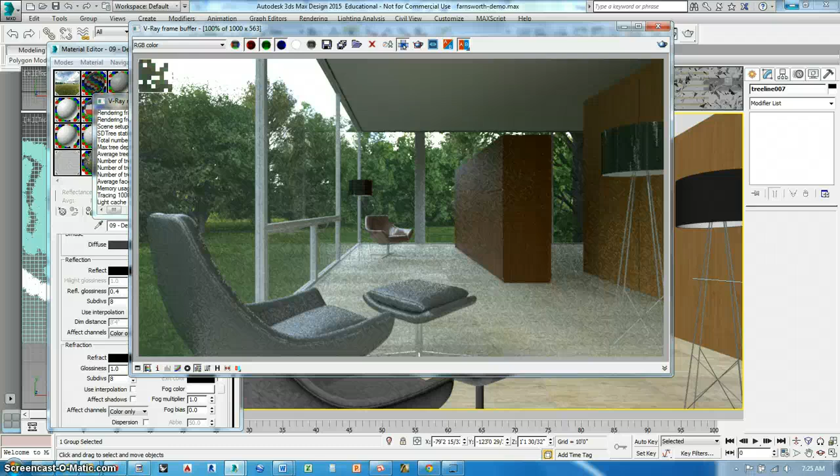Okay, so here's my final test render. This actually went pretty quickly for me, it took only about 7.5 minutes. It's just about done with this last little square. We still had the noise set relatively high, actually very high, and some of the other settings were set low.

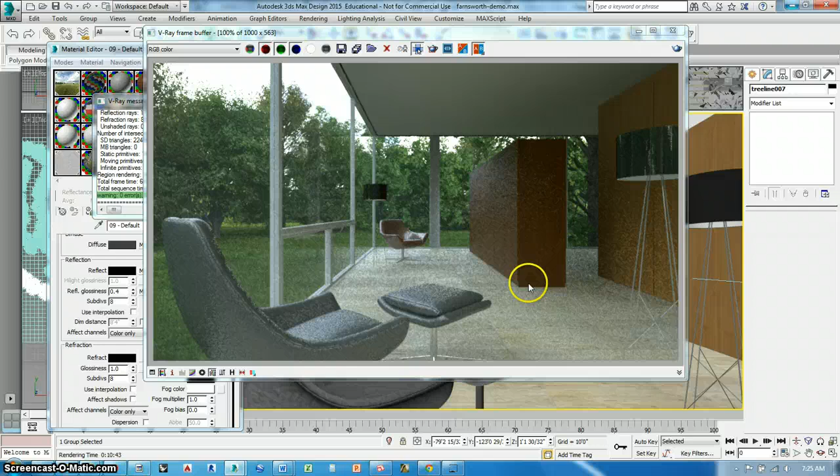This furniture layout's really bothering me, so I'm gonna change it now. I'm gonna try to set up my final render.

If you ever close out and you want to get that back, just go render setup, Vray, show last VFB, Vray frame buffer, and that'll bring it back.

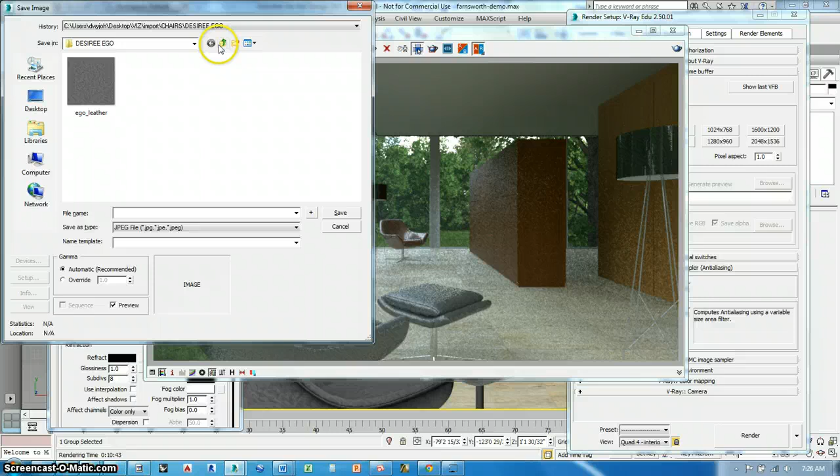To save the images, you just click this little guy right here, save. For now, let's just save them as JPEG since we're not going to do any post-production on these. I would stick it in your render output folder in your viz. Put it in there and maybe name it interior test-1, and save it. Do it as the best quality, largest, normal, okay, and save it off.

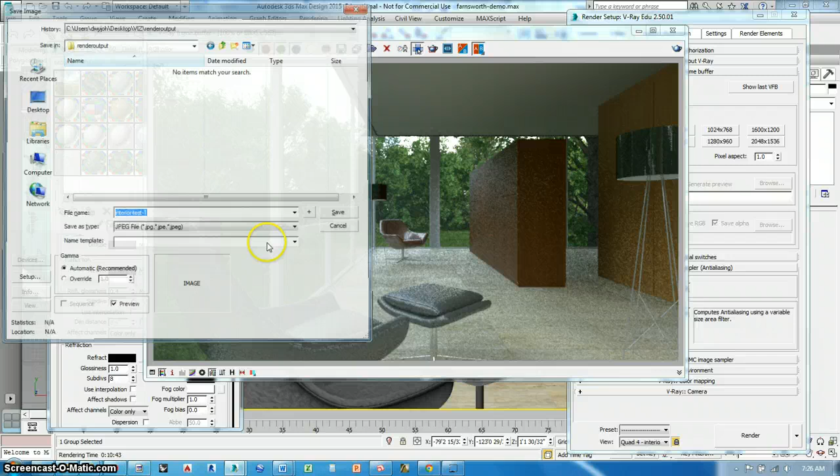So now I want to do a final render, and there are ways to do a final render really fast by just sampling a certain part of the image. Maybe what I want to do too is mess around with a couple of the materials and move some things a little bit differently. So let me try a couple things.

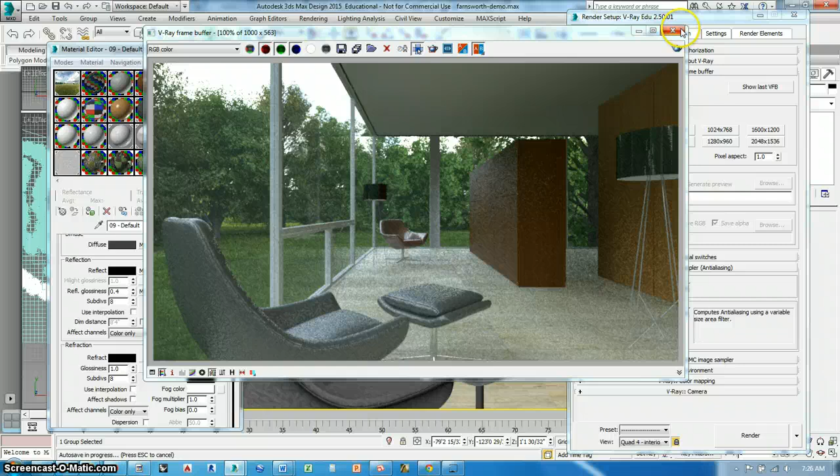First of all, I think I want to change this material and I want to move some furniture around. So I'm going to go ahead and, at long last, get rid of this thing, which just looks so weird here. And then I'm going to take this guy, which I believe is in several parts.

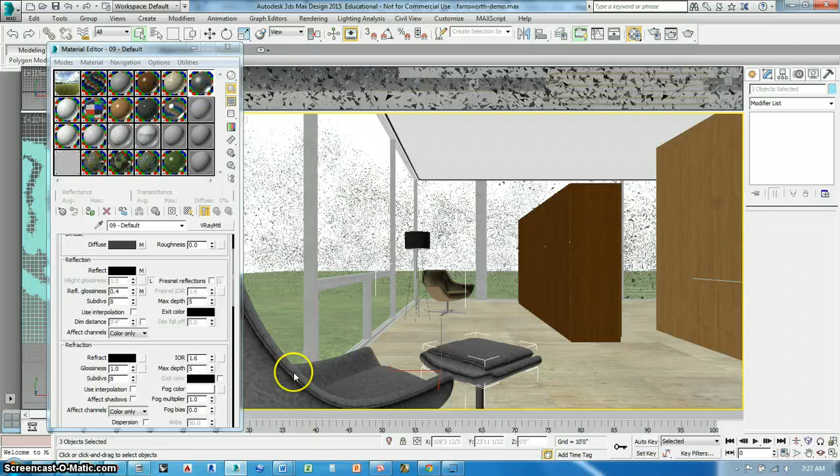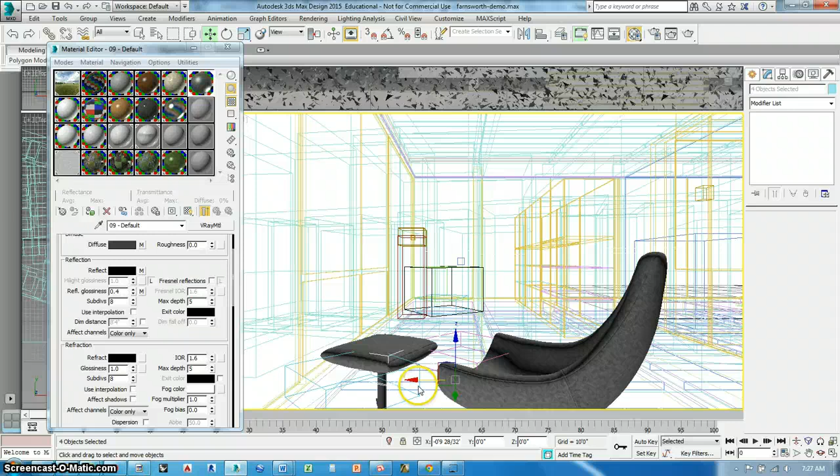Isn't he? There we go. Rotate him around. Doesn't seem like you'd want to be looking out when you're sitting here, so that's what I would want to do. Oops, I missed some things. Let's see if I got it this time. Nope.

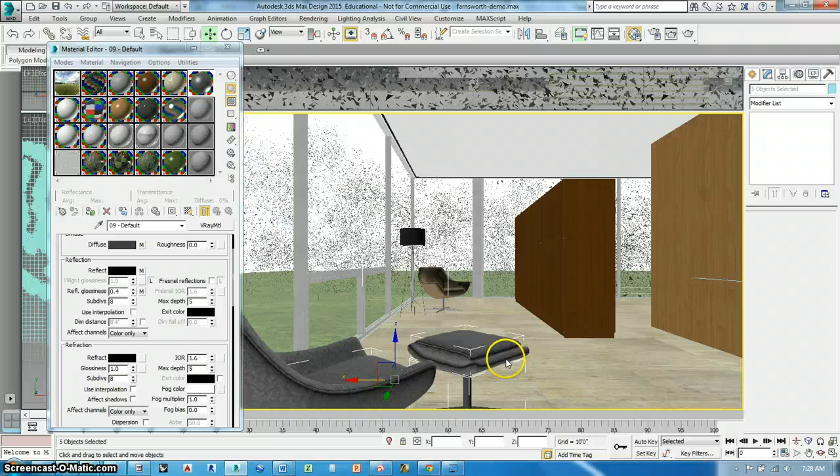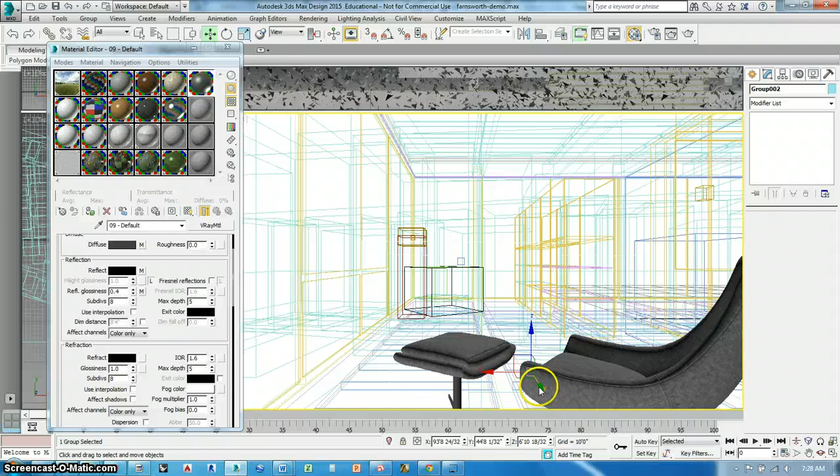I'm gonna get this all selected and group it so I don't have to do this funniness again. If you ever want to get other stuff, you can go to Model Plus Model, Design Connected, or Turbo Squid. There's all kinds of sites for learning how to do this stuff and getting other free models.

I'm going to set this just so that it's just kind of off the screen, and these are kind of looking at each other just like that. And then I think what I want to do is adjust this material.

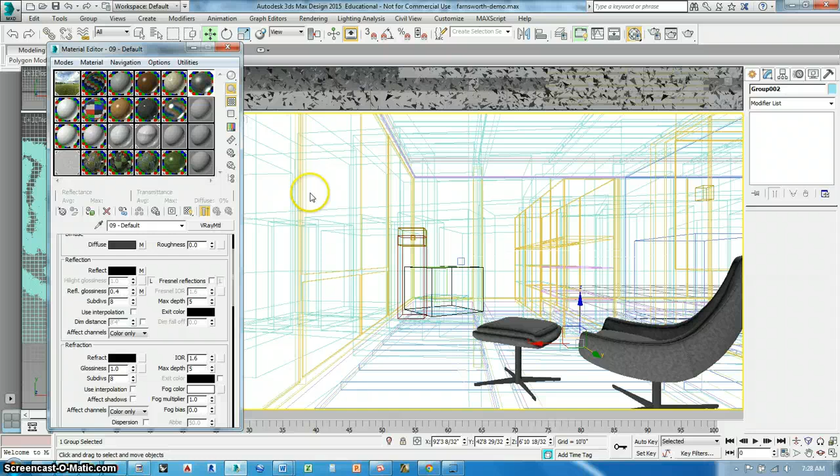So one of the things I can do is go to my little pick tool, and I have a couple of open spots, and I can pick that leather material, and then it'll pull it up and give me what it is. I want to swap this out for another material, so I can go to material, select by material, select, then get material, and choose another material or make it.

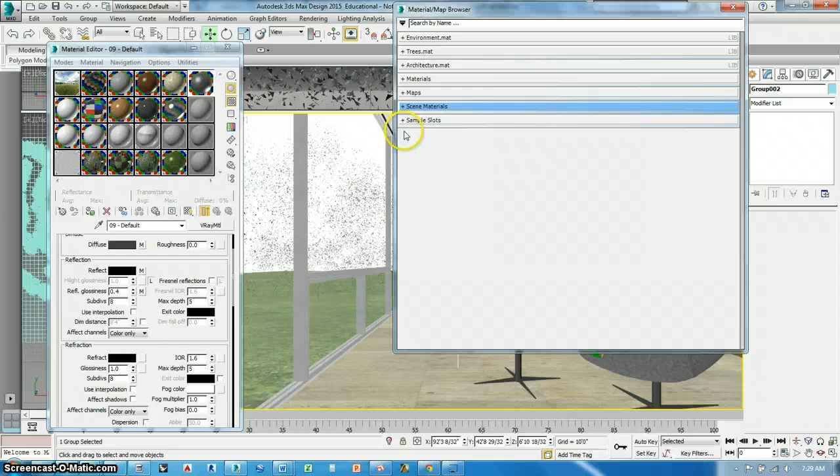But what I think I'm going to do is this. I'm going to get that guy because I kind of like that material, it's sort of brownish leather. Then I'm going to go assign to selection, and that should give it there. So that assigned it to everything, which I did not want it to do.

Let me try this again. Select by material. Assign to selection. It wants to group it. Okay, let me select this guy and ungroup him.

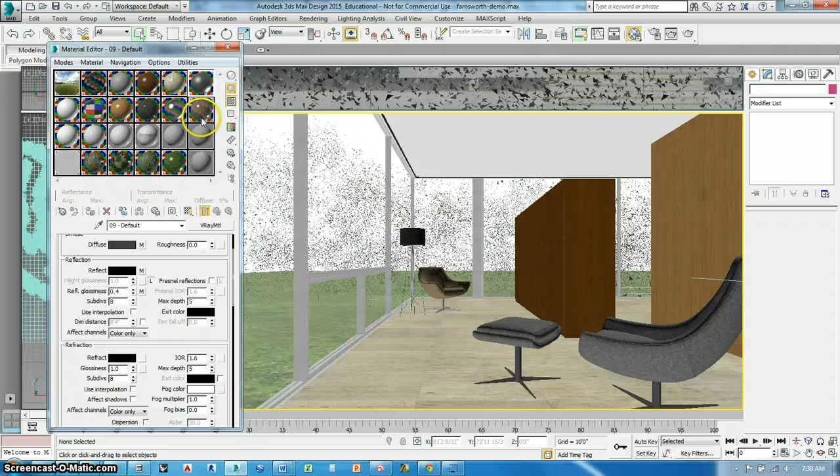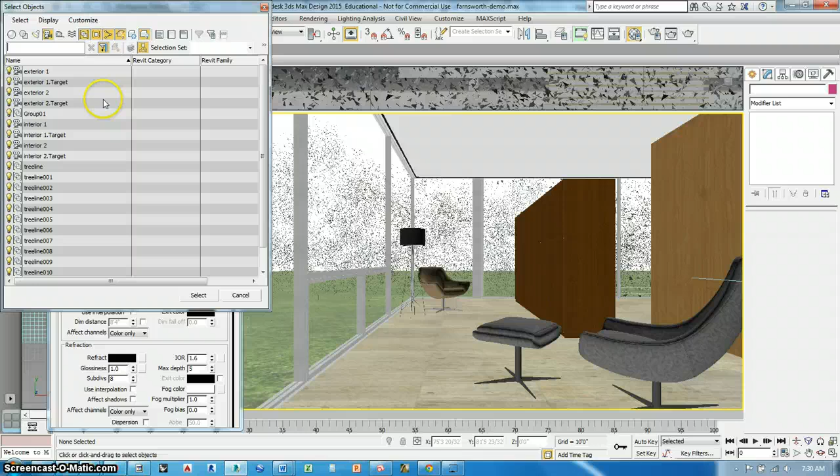Select. Assign to selection. Not doing it. Select by material. You're in there, I know. Aha, these aren't turned on. There we go.

So now these are kind of matching, so that's nice.

So then I want to go in and put my render settings back where they belong: 2000, 2000, 0.01, and 0.01. You could also try 0.005 if you want, but it's going to take twice as long to render, so it'll be a couple hours to render that one probably, which is not uncommon. I usually hit the render button and go to bed and let it go.

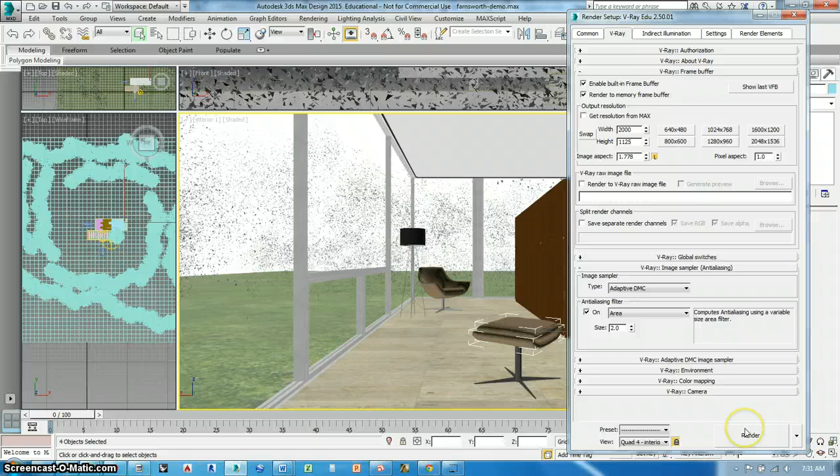But let's call that good. I think we hit everything right, so that's going to do it. That's going to be our final render setup. We've done it all. The last thing I'm going to check before I hit the button is go through my materials one more time and make sure I've got all the subdivisions set right.

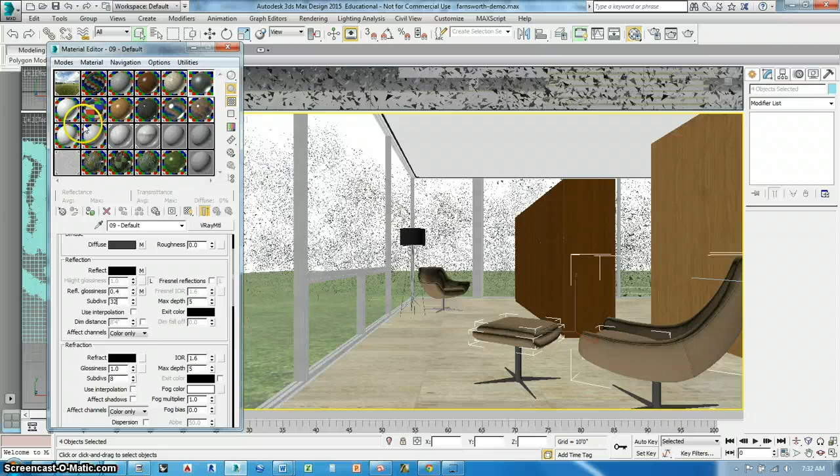Let's make that 16. Anything that has reflect glossy, make sure those subdivisions are set to like 32. Let's see here, yeah, that should be 32. That should be 32, except that's not in the scene, is it? But that should be 32.

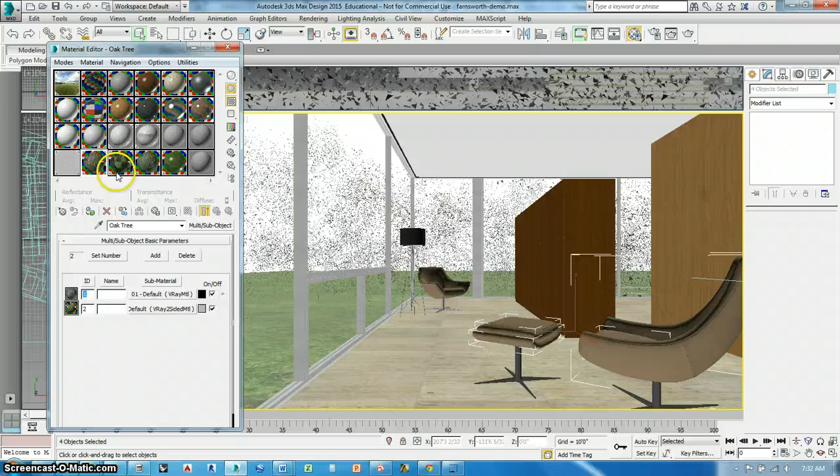Good, good. Oh, 32. Yep, yep, good, nice. Just checking in on all of them. If you're getting some noise in your final render, you may even need to turn this up to like 64. And those are all my tree materials, I think they're fine. I'm going to double check and make sure my displacement's turned on. Everything's good, anything else I need to do?

That should do it, I'm going to hit it. Here I go. I'll check in with you a little bit when this is done.